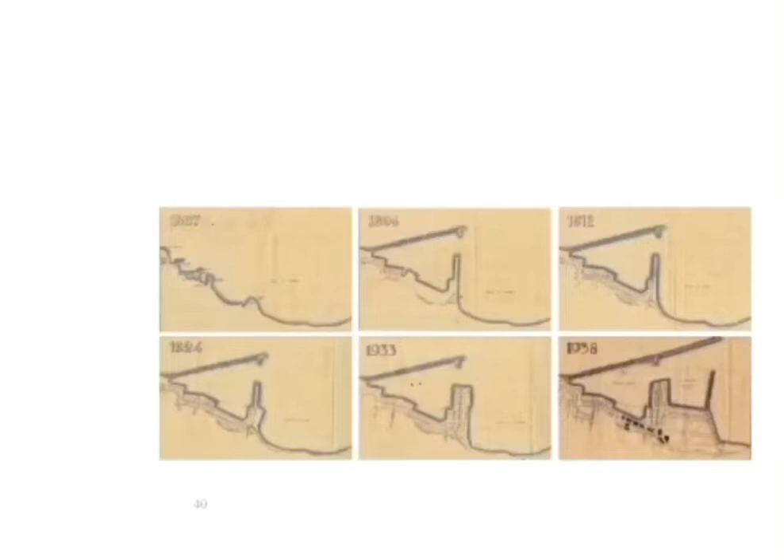Our group research was about traces of the past, where we talked about the founding of what has been there from before, and still their traces remain to discover the founding. Our aim is to reinterpret Lebanon's past to create a new collective memory for the nation. Start talking about the milieu around our site.

As I started first with Karantina, it got its name from the French term La Quarantaine, since it was a quarantine station for maritime travelers. Next to Mar Mikhael, you'll find Gemmayzeh. The name Gemmayzeh comes from a tree carrying its name, Jemmayz, but now the tree is rarely found since most of them are cut down, making way for more buildings.

Nevertheless, in Mar Mikhael you'll find the Mar Mikhael train station. It is a remnant of the old railway station that used to serve Beirut. During our recent visit to the port, we found old remnants of the train rail tracks that are still present and never got removed. What actually caught my eye more was the tramway more than the train, since it was the clearest memory for those who remember the area.

The tramway system provided Lebanon with electricity as well as organizing the time because of its schedule of arrival and departure, which led to the setting of tower clocks by the government officials. In 1931, the tramway covered 12 kilometers around Beirut's center. Nevertheless, as cars became more popular and widely adopted, the tram tracks were removed. It was fully decommissioned in 1968.

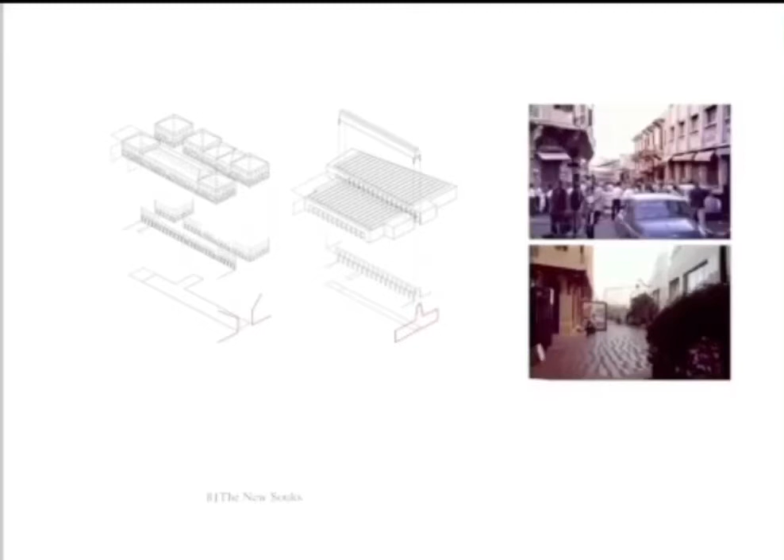Thus, the new souks, through preserving their characteristics, locations, volumes, connections, and function, challenge the problem of the tabula rasa for the reconstruction of the city and its continuity.

Once the wall was destroyed, gates were left as they were, and Beirut became a different place. When the wall was destroyed, people had more freedom to build and expand their structures. This was where the Beirut Damascus Road came to life in the 1860s, and the port was founded in the 1880s.

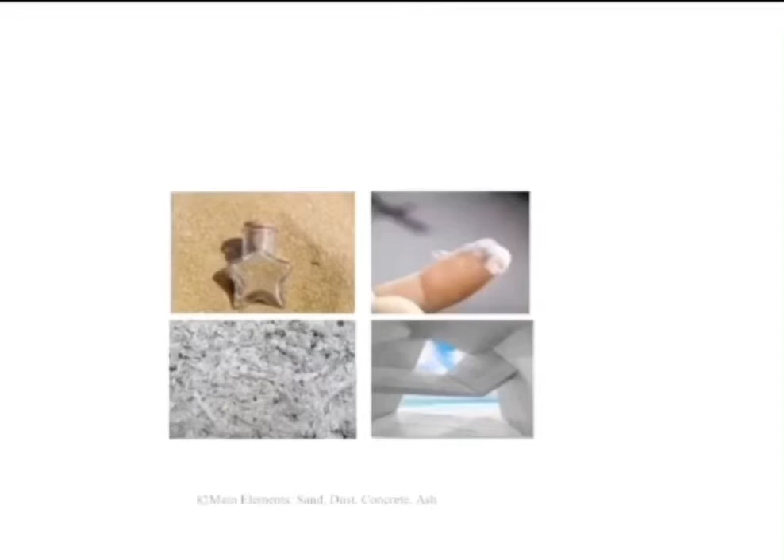As part of our study of the site, the incorporation and the examination of the main elements, sand, dust, ash, and concrete, that are vital components of our target space is a way toward a better understanding of the founding and in mediating between nature and artifact by the transformation of raw matter into one form or another. Once built from concrete, through fire and ash, turned into dust and sand.

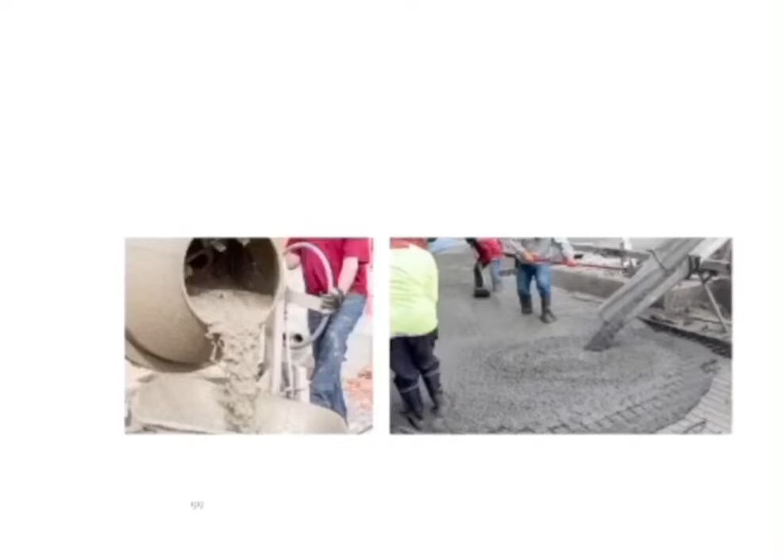So, the new material that is ground will reshape the site as the seeds inside the silos will fall and grow, giving a new life to my site many years later. So the site will be reborn as a place of peace and prosperity.

The story behind my concept starts when we enter the port to see all the rubble, the ashes, and the broken steel. The Lebanese army was on the front line on the day of the blast. They started breaking the concrete blocks with hand hammers and machines. They are grinding them in order to rescue the life underneath the rubble. So my project aims to grind the concrete for over 100 years to keep the memory of the blast alive for all those who lived through the tragedy.

So I'm grinding the silo slowly, which is creating dunes of concrete dust carrying inside them seeds of trees that have dominated the area in the past and remnants of them barely exist now, like Jemmayz trees, giving new life to the site for the new generation. My intervention is valuing the memory of the space by grinding the silos and providing a new vision for a new future. So, my project is an operational performance that does action and generates a result.

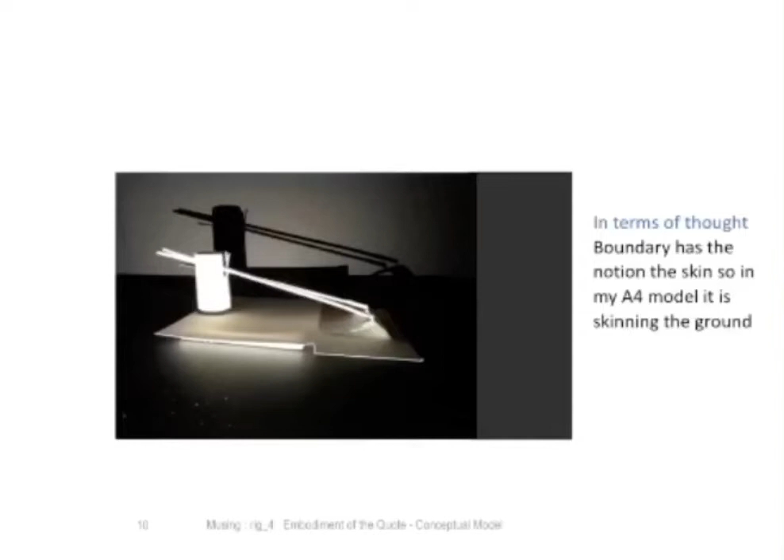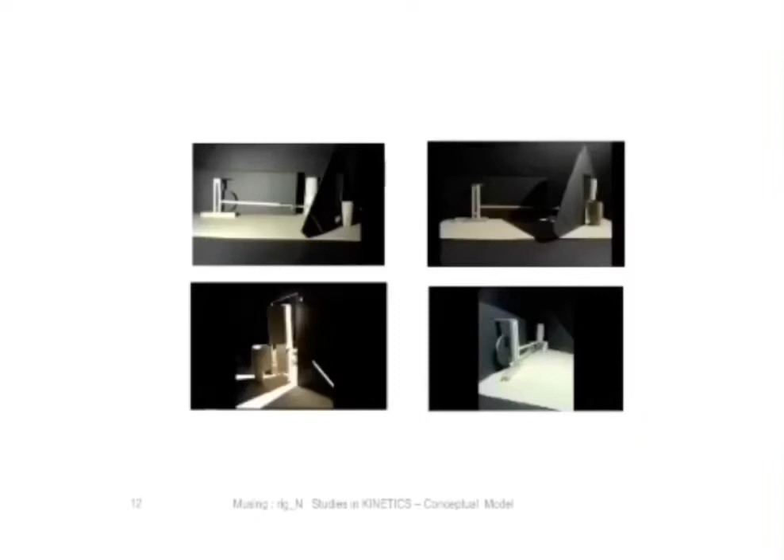In my rig 4, I try to relate my model to the thought that the boundary is a place of contentment and conflict. My idea was to push and pull the ground to become a limit action. As for that, the earth was the boundary. So, the boundary is a notion of the skin. So, skinning the ground as boundary where the ground is barely pulled out. Model rig N. While setting kinetics, I try to express how rotational motion can move into translational motion.

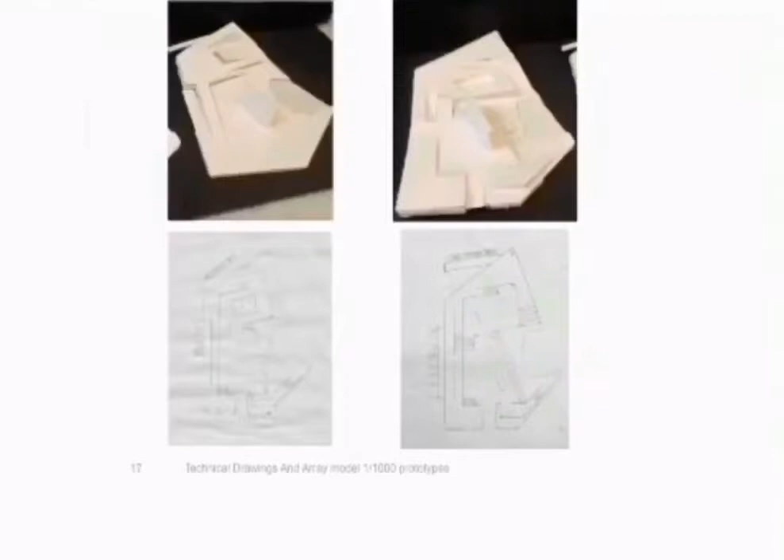In my array model, 1 over 1000, this is an exact replica of the destroyed silos that I redid, showing the amount of damage on a small scale, which is 1 over 1000. In the technical drawings prototypes, as you can see in my prototypes, I made multiple models and site plans where most of them have slight changes between them to develop into the final model.

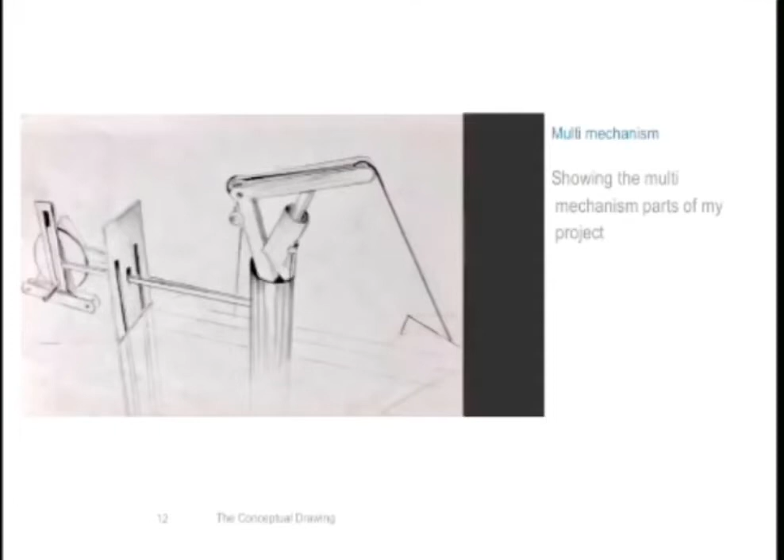In these drawings, I try to represent the identity of my mechanism, where with extreme care and precision I was able to create strong visuals of my project as I imagined them in space, where I tried to represent the main character of the mechanism, which is providing motion.

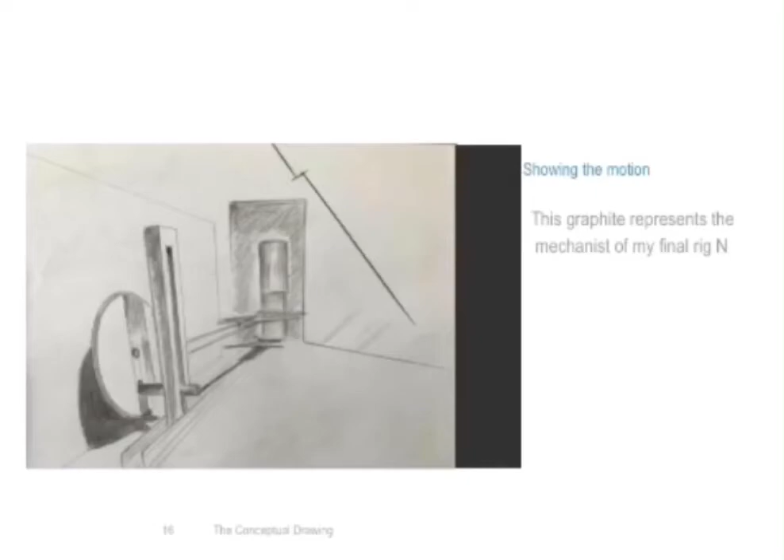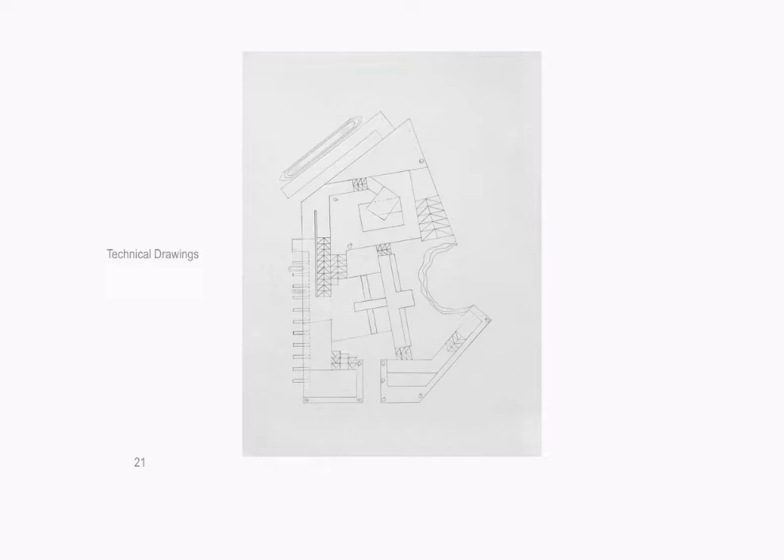In the technical drawing, this drawing is a site plan of the model, where I chose the silos as my center point and tried to develop it. From it, I made parallel axes. In my array model 1 over 1000, I tried to make my model also according to the axes, which are parallel to the silos and according to the borderline.

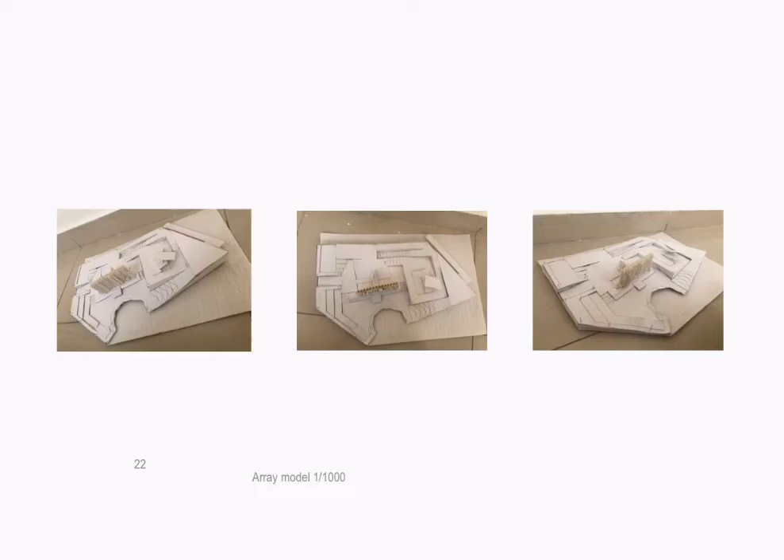I put my room on the highest level to allow access to the visitors to go underground to the bay, where ships, boats, and yachts can dock on both Q7 and Q8. I tried to play with the levels of the ground as much as possible for the visitors to enjoy the levels of the area. In my final model, I tried to keep the previous mechanism and develop it.

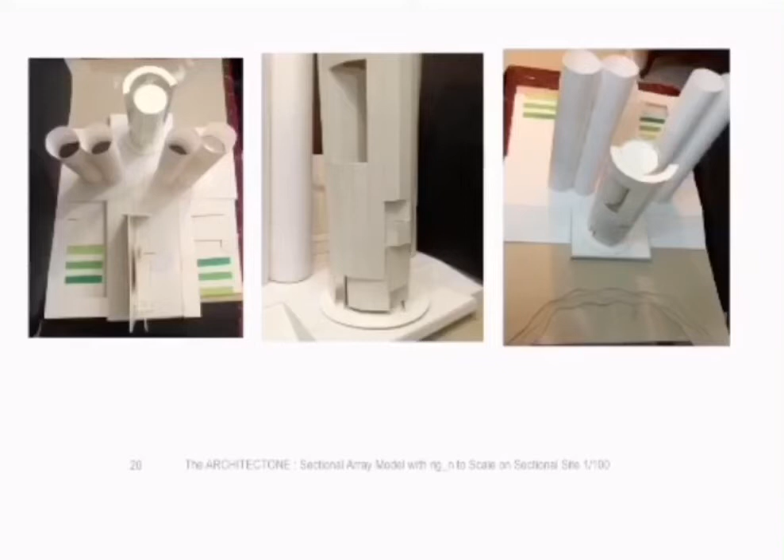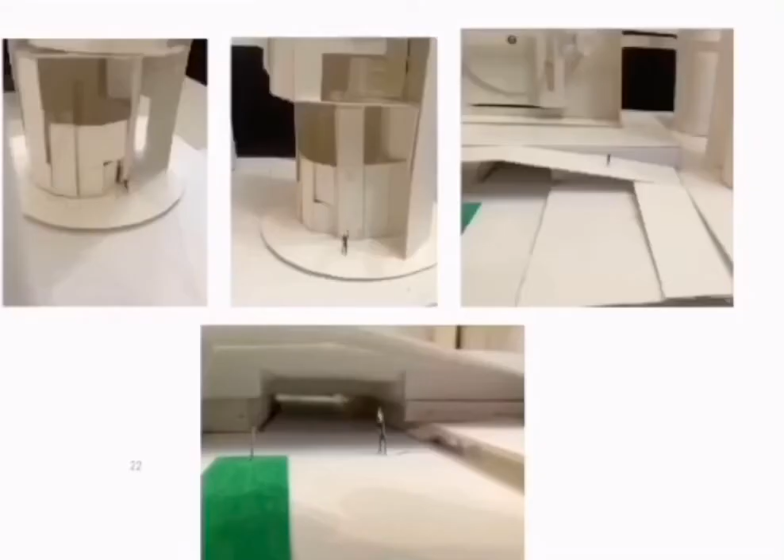I tried to interrelate the idea of the boundary with the notion of the skin, where the boundary now turned from skinning the earth to skinning the volume in space, the incoming cylinder. It becomes a boundary because the inside and the outside now are interrelated. They have a relation between them, but they are distinct.

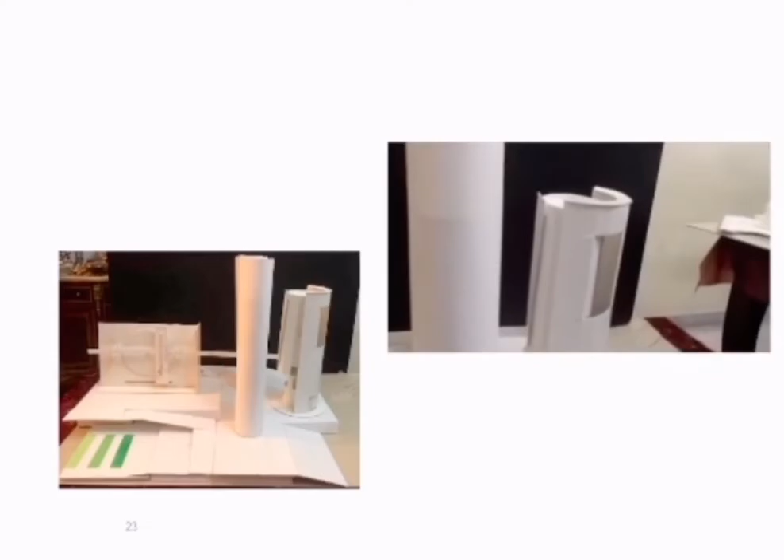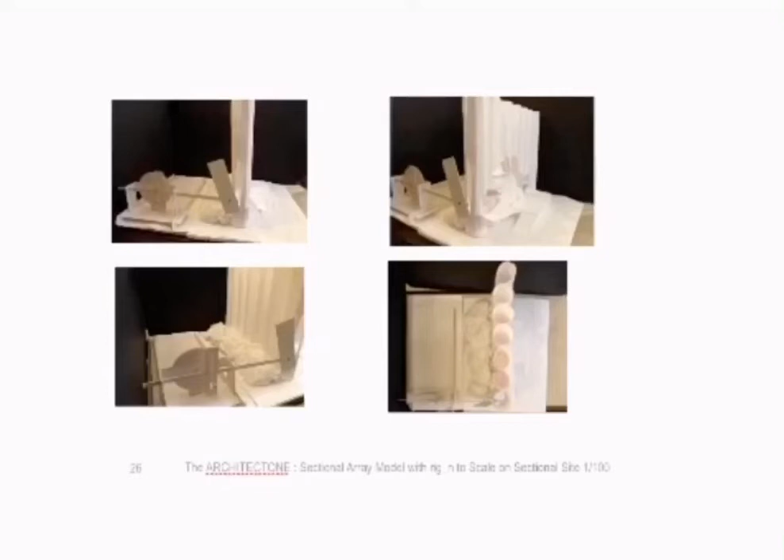My project reacted in how I raised the current time and moved into the future, allowing ample time for the absorption of the catastrophe. I'm grinding the current silos to erase slowly the effect of the blast in order to propose a future vision. In my 1 over 100 model, the room acts as a place for prayer and meditation.

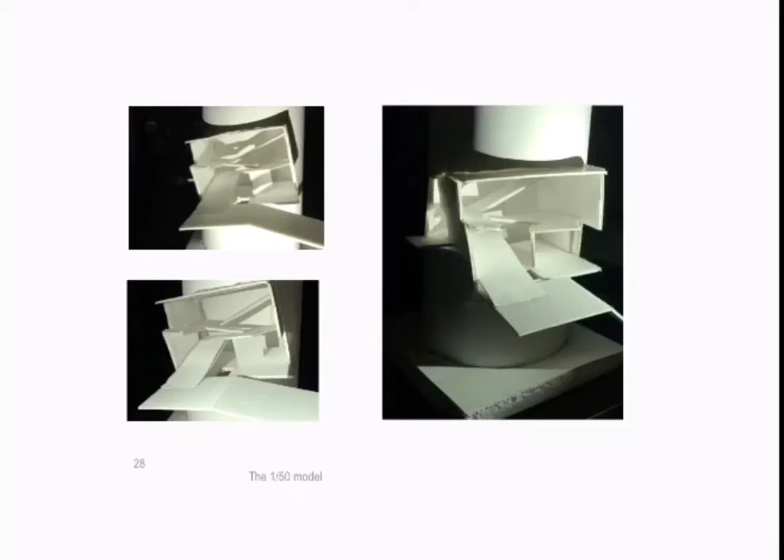It's creating space that allows visitors to connect to the place while casting shadow inside the rooms, creating a place of serenity. It's a place for gathering, healing the wound of the people. Like the 1 over 50 model, the 1 over 100 model is a continuation of the many rooms I have on the silos. This structure creates a degraded environment and follows a certain order.

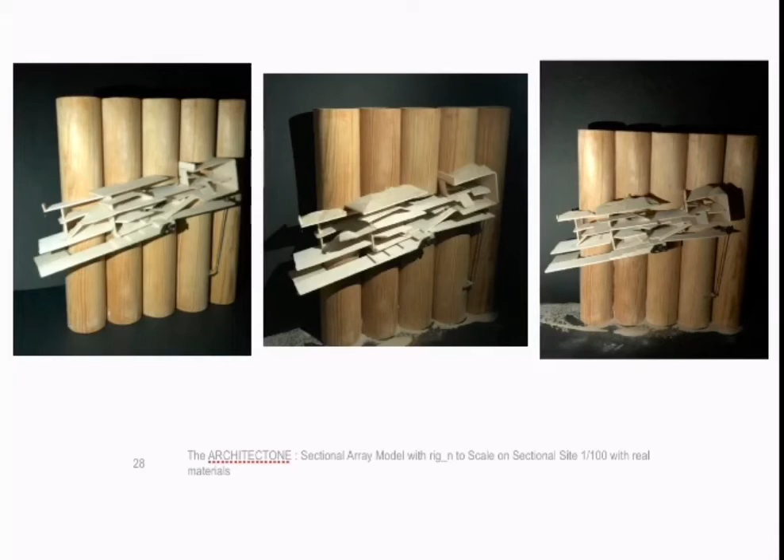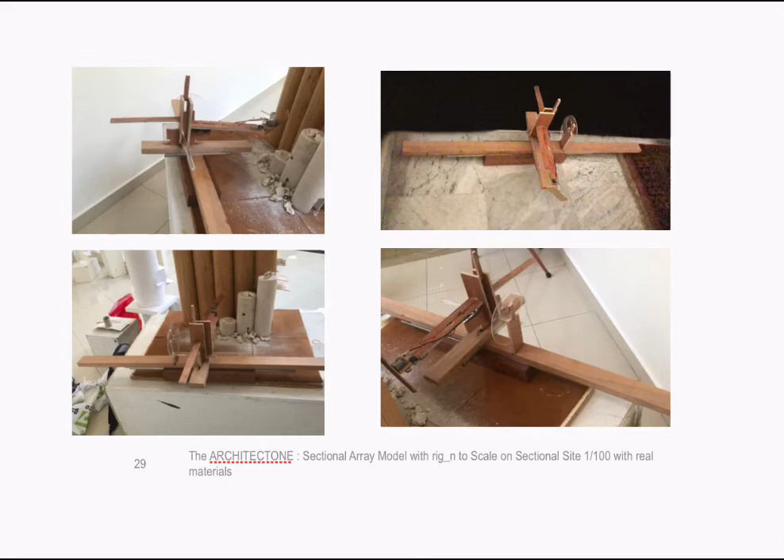As you can see, my mechanism evolved from the beginning but kept the same idea of the wheel and the motion. I integrated it into my project, for it became a crucial part of the project. The mechanism is an independent machine. The mechanism is about turning rotational motion into linear motion, moving back and forth orthogonal to the silos. Another motion allows the machine to grind all the silos with the propeller having sandpaper on it. We've reached the putting together stage of my model.

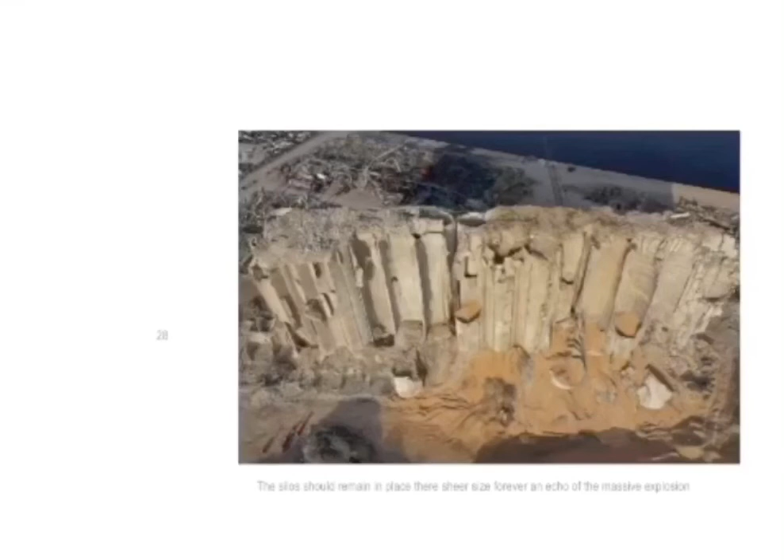In these pictures, the site shows the remains that stand as a memory of those who are no longer with us. They embody now the absence of those who were lost. Their remains will allow us to remember them and turn their absence into presence. A sense of disbelief would prevail as the sun rose the next day, casting light on the extent of the damage. The silos were also a refuge through the years of the war, as there was storage on the ground floor and corridors. Imagine how solid that building was, and now it's the victim.

Our entire project is based on how we can revive the area after what happened, where the site now allows for things to grow, as there are grains on the site that began to sprout. So the grains are some kind of symbol of hope that we can continue but never forget what happened.

History in my project came through picking the tramway as a point of inspiration, since it goes in one direction and doesn't change its path. The government removed it, so I created a really complex mechanism where the mechanism is an independent machine. The machine is about turning rotational motion into linear, moving back and forth orthogonal to the silos, as you can see, which allows the machine to grind the silos with the propeller having sandpaper on it. There's another motion which allows